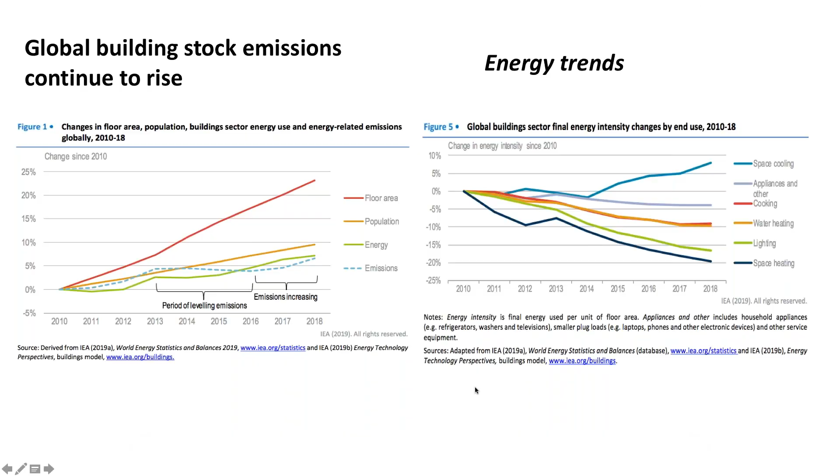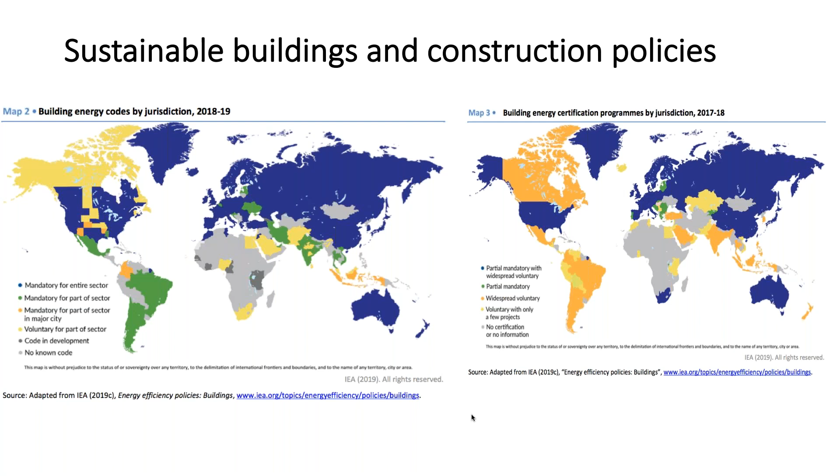So when we read this global roadmap recommendations, we understand that we have to be very careful with urban planning, with new buildings. New buildings have a high potential to be more efficient. We have to work with the existing building stock because there are ways of turning it into a more efficient stock. Building operations are very important, and you can save a lot of energy with nice building operations. We have to think of systems being more efficient as a whole, buildings connected to the electric systems and interacting with them. We have materials that can be more efficient, less energy intensive.

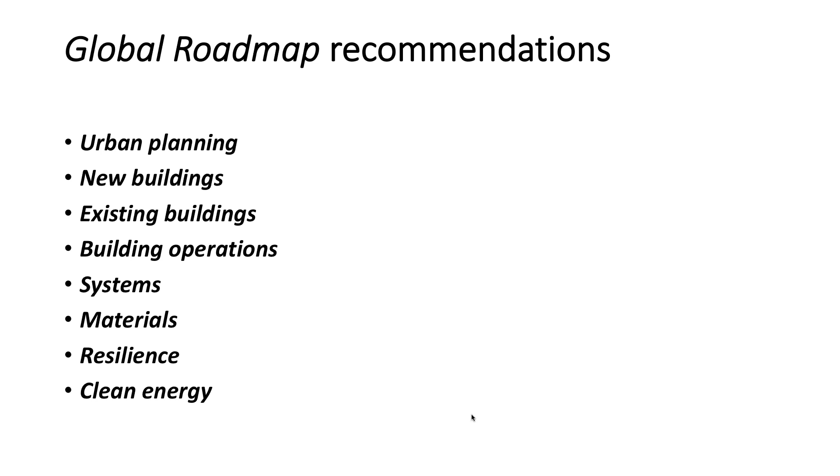We have to think on resilience. Probably in the future, we might see some energy not being available for some times, and we have to make buildings that can resist to that. And of course, we have to think on clean energy for growth.

Energy efficiency was something that was not on the International Energy Agency agenda, but in 2013, we've seen it becoming part of the agenda, and they defined energy efficiency as the first fuel to be used, because it will never finish. You can always be more efficient.

When we think about weather and climate change, this study from IEA shows us that if we want to tackle climate change, avoid it, or minimize it, we have to think heavily on energy efficiency. Renewables are important, even nuclear will be important, but energy efficiency is really the thing to be invested on.

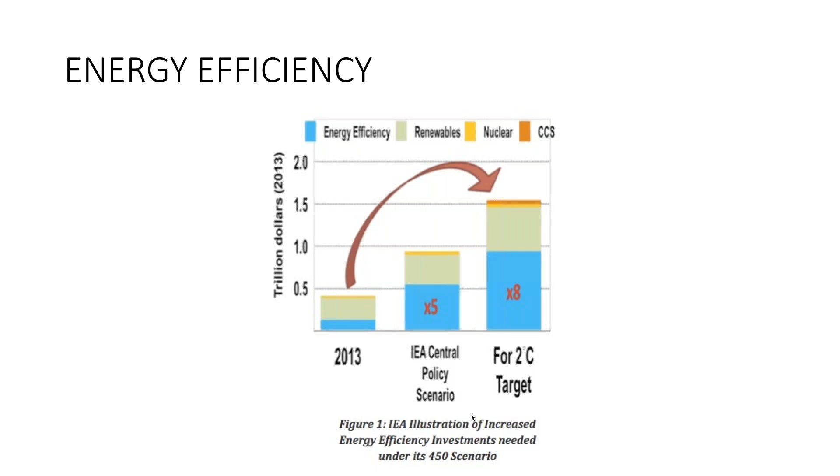If you work in the area of cooling, and most of the people involved in this conference, people from ASHRAE, should read this book from IEA, The Future of Cooling. There are large opportunities for energy efficient cooling, and we are just skimming the surface. We have to really dive into this to provide more efficient cooling as a whole, not only machines, but systems, design, and everything. So read this book, it will inspire you.

Speaking about the Brazilian energy system, I brought you some data here. What you can see is that as a whole, Brazil is consuming almost 500 terawatt hours. We consume a lot in the industrial sector, but residential comes just behind, and the commercial sector also. So these are very important consumers of energy, and you have more data here.

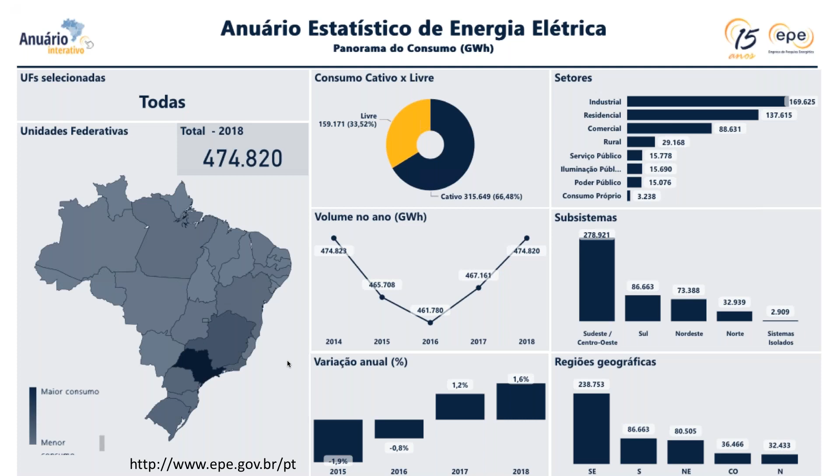When we look into the consumers, we have 83 million consumers in Brazil. 72 million are in the residential sector, and commercial is much less. But of course, the amount of energy used by the commercial sector is quite substantial also. Residential is really intense in Brazil.

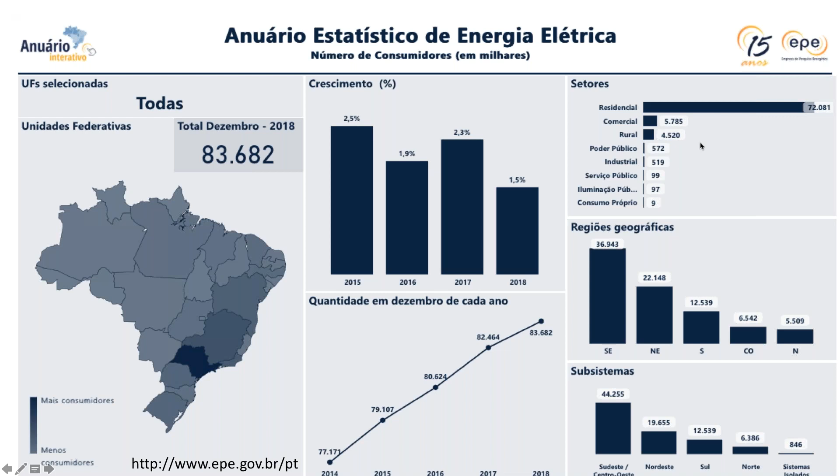When we want to see how much energy is used in buildings, electric energy, we can say that 50% of the electric energy demanded in Brazil is for buildings. Half of this is for residential buildings, and the other half is for public and commercial, or non-residential buildings.

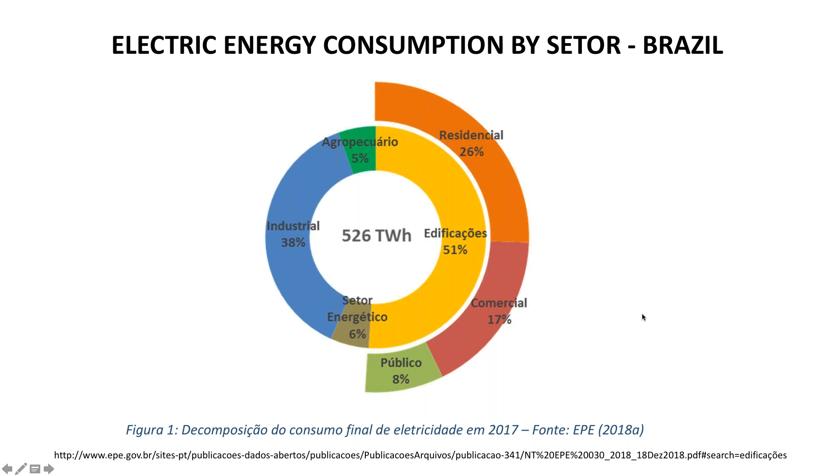And if we look into the electric energy, we are even more renewable. When we think on CO2 emissions per capita, Brazil is very small, only 2 tons of CO2 per inhabitant. When we look into the USA, it's 15, and also China and the European Union. So we have a clean energy matrix, and we have to keep it clean in the future.

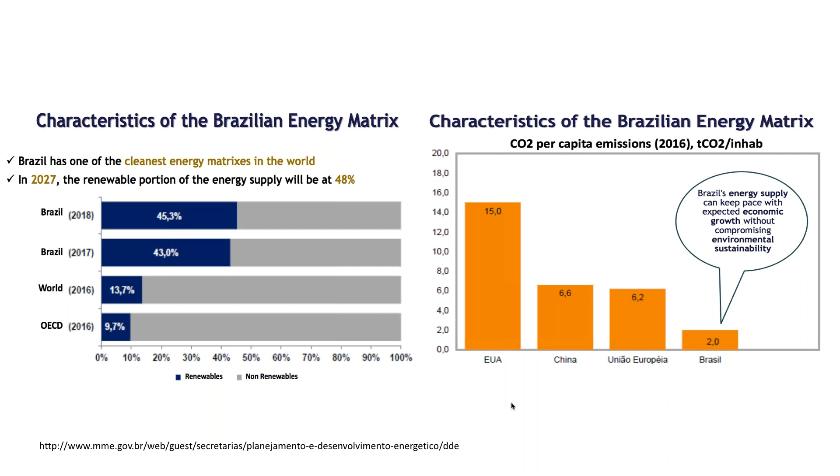This is a bit outdated, it was only updated in 2014, but it shows you the emission factor of our integrated energy system. You can see that it is very low most of the time, and then it becomes higher when we have dry seasons, because we are heavily based on hydro.

But here I can say that the electric system was handled in a very inefficient way. This was towards the re-election of Dilma, when we had an energy crisis due to some drought in the country, and the crisis was hidden from the population, and nobody was saving energy. So this was a pity.

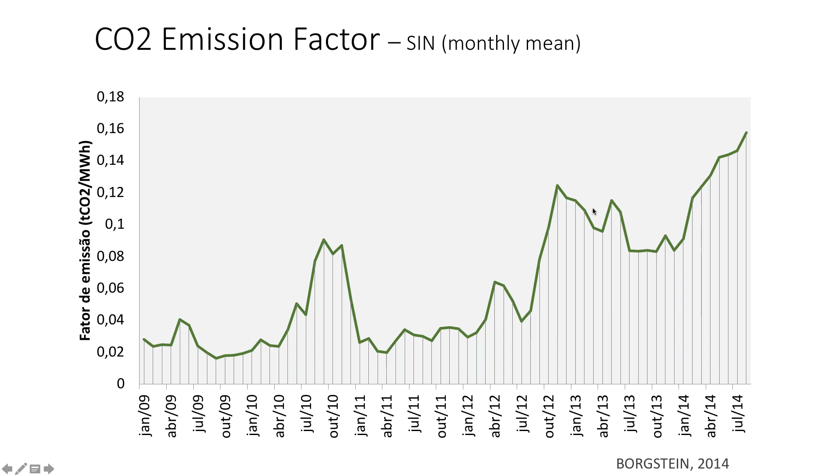The other thing that is changing is the peak time. If you see in blue here, you'll see the time of the peak during the cold months. It's normally in the evening, after 6 o'clock, generally associated with the electric shower. But if you look more to the right, you will see that in the hot months, the peak is moving to the afternoon, between 2 and 4 o'clock, and this is mainly air conditioning systems.

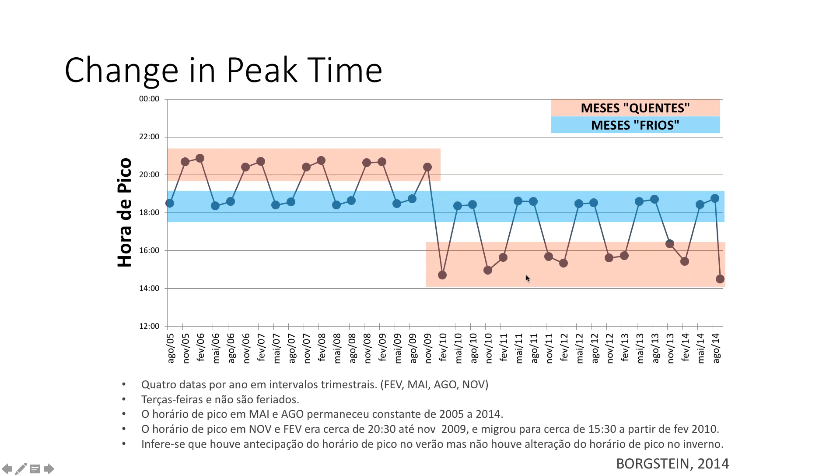So we have to be careful. Air conditioning ownership is growing, and mainly we're speaking here of the commercial sector that is working during the afternoon, and it's causing stress on our electric system. So we have to think about that to be more efficient.

Just a big overview of how strong our electric system is. We have a very nice interconnected system, as you can see on the right here. We cover most of Brazil. It's nice to see that our central generation system is heavily based on hydro.

Wind energy is the second, but it's going to be doubled by 2027. We have natural gas, and we have solar that is increasing substantially, and it's bound to grow even higher in the next years. This is all governmental information, and I give you the reference here.

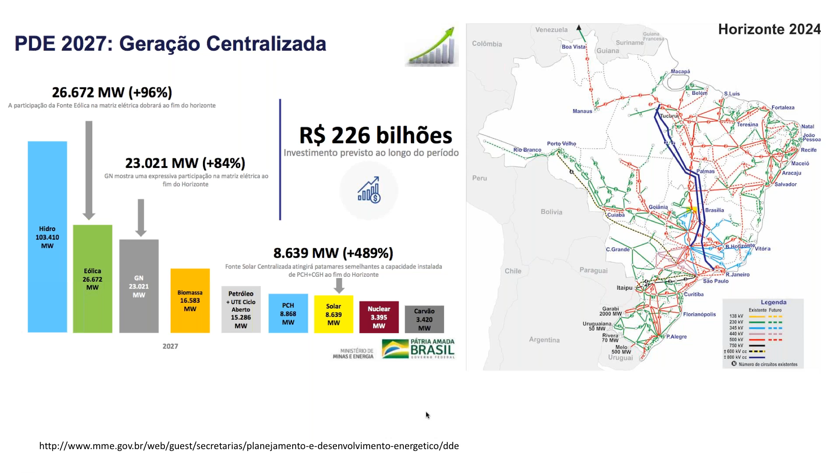Distributed generation is also being invested in heavily in Brazil, and here we can see the importance of zero energy buildings in the future and this kind of thing. You see that the forecast is to have 1.3 million micro and mini generation units by 2027. So this is a sector that is growing substantially, and this is what we call green jobs.

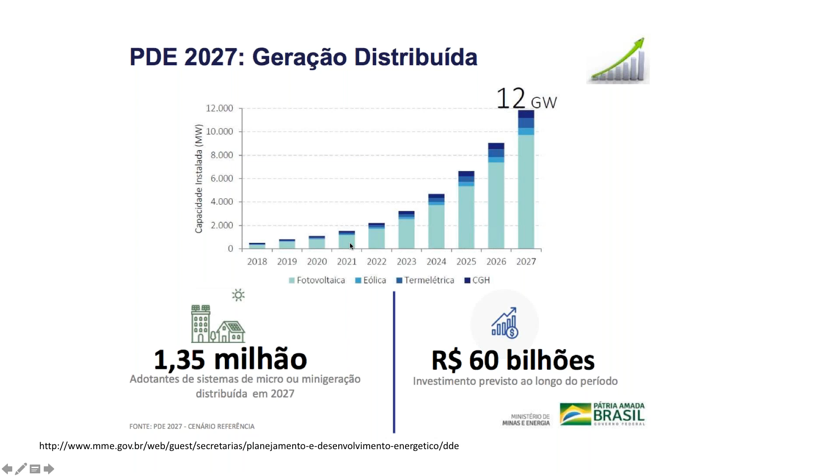The strategic vision of energy efficiency in Brazil, from the governmental view, is that it reduces costs and increases competitiveness. It can raise economic efficiency. It's good for business, it can delay investments in infrastructure, and it reduces social and environmental impact. So it's good for everybody.

A brief history of energy efficiency in Brazil: the Brazilian labeling scheme started in '84. In '85 they started Procel, the Brazilian Energy Efficiency Program. In '91 they started Conpet, the equivalent to Procel for gas. In 2000 we had the creation of ANEEL, the regulation body for the electric system. In 2001, due to the electricity crisis at the end of the Fernando Henrique Cardoso government, caused by lack of investments in the system and a dry year, law 10295 was approved.

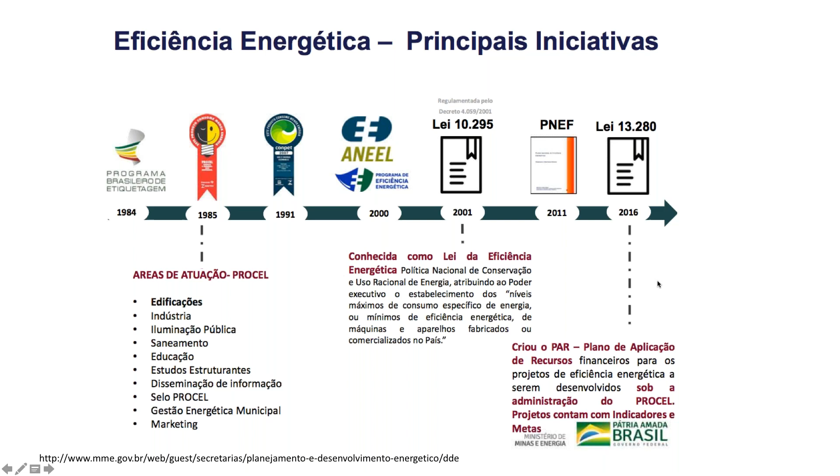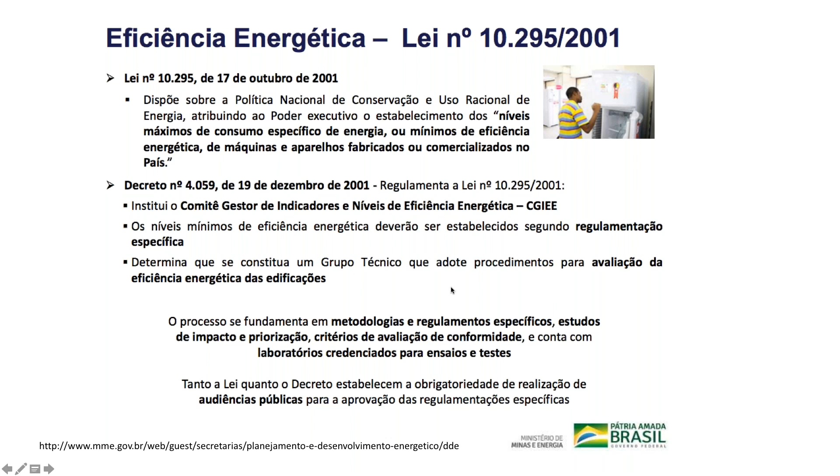This law creates the CGIEE, the committee that takes care of energy efficiency indicators, where minimum efficiency standards for appliances are approved. I am a member of this committee representing the universities. Inside this committee we also have a technical group working on energy efficiency in buildings, where I'm also a member.

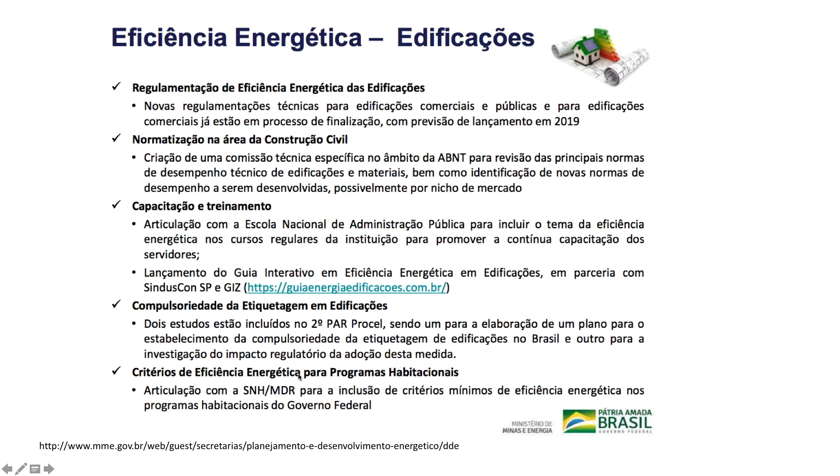So what's the governmental view of energy efficiency in buildings? They think we need regulations, we need standards, we need training, we need to work towards compulsory labeling, and we need to put more energy efficiency criteria into residential programs from the government.

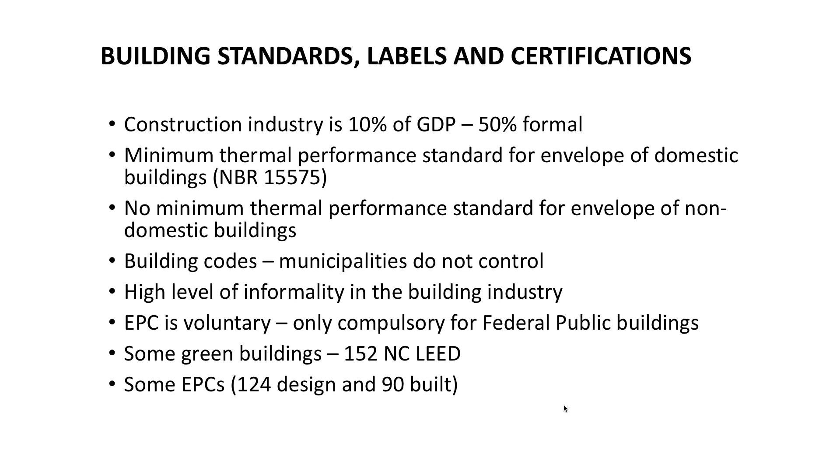So let's speak a bit about the Brazilian program of labeling. It involves fridges, air conditioning, PVs, solar heaters, lighting, TVs, and buildings became part of this agenda.

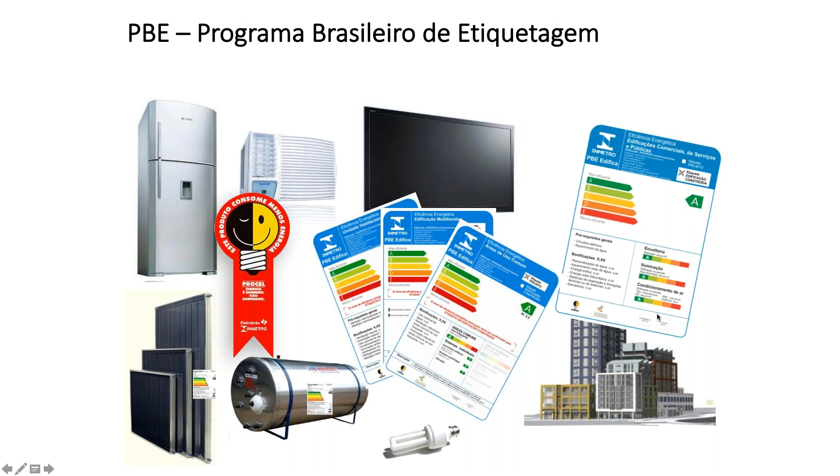If you want to learn more about the Brazilian labeling scheme, you can watch this site, pbedifica.com.br, where you can find all information on the labeling system for residential and non-residential buildings.

We started the system in 2009 with non-domestic buildings, and in 2010 with domestic buildings. And in 2014, it became compulsory for federal buildings.

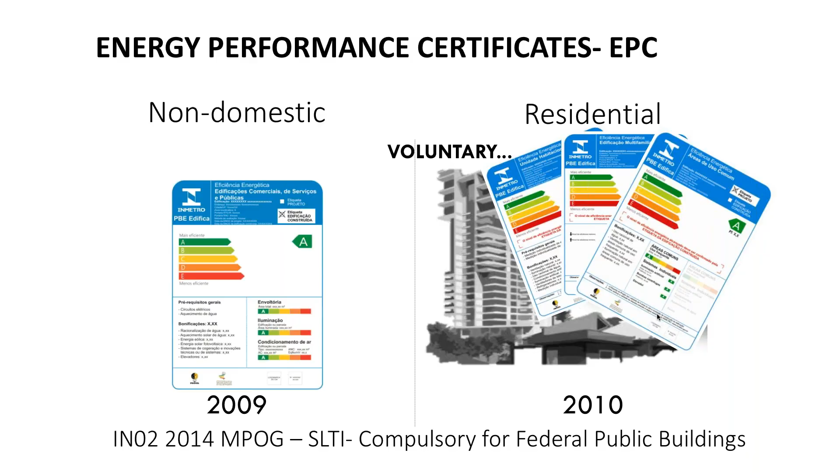In 2014, also together with this compulsory need for federal buildings, we created an ordinance that required everything bought by the government to be efficient. So the idea is, if the government buys a split system or car or anything that has a label, it should buy the more efficient one in the market.

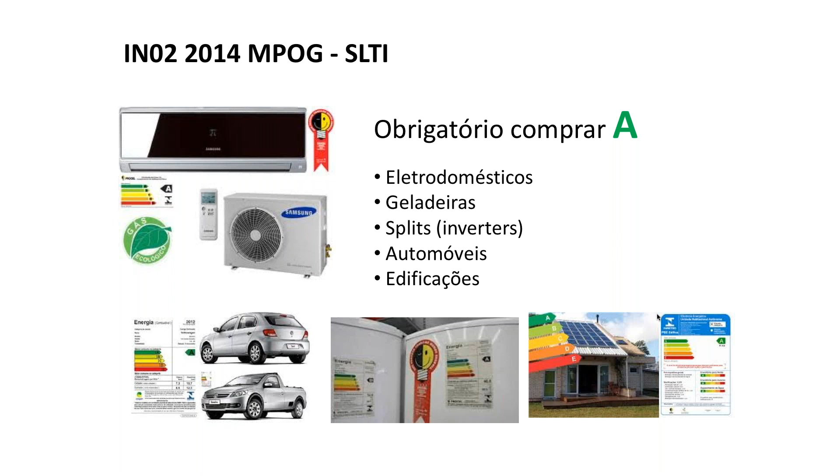So how does the label work? We have a label given in two instances. One instance is the labeling of the design, so this is the intention to build. When you do the design, you have only an intention, and this label is normally confirmed or not confirmed when the building is delivered.

So the idea here is to protect the consumer. When he buys the intention or the design, he has somebody to check if the efficiency was delivered to him after the building was delivered.

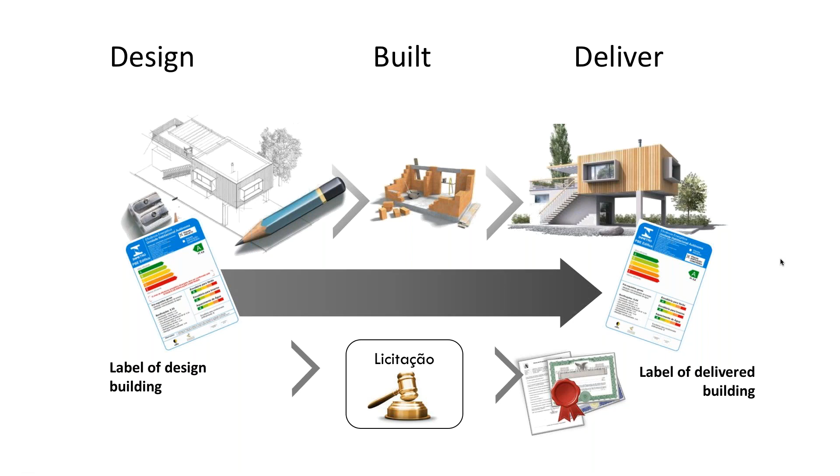You can evaluate the building in two ways. One is a simplified way, like tables or simplified models. We used to call it prescriptive, but it's not so prescriptive because it has some modeling behind, like normally very basic models like regressions and things like that.

But you can do the simulation, and the simulation is really the proper way of evaluating a building. With small buildings, normally it doesn't make sense to be involved in simulation, that can be a more expensive exercise. But with large buildings, I would say that we should be using more building simulation, because we can optimize them substantially.

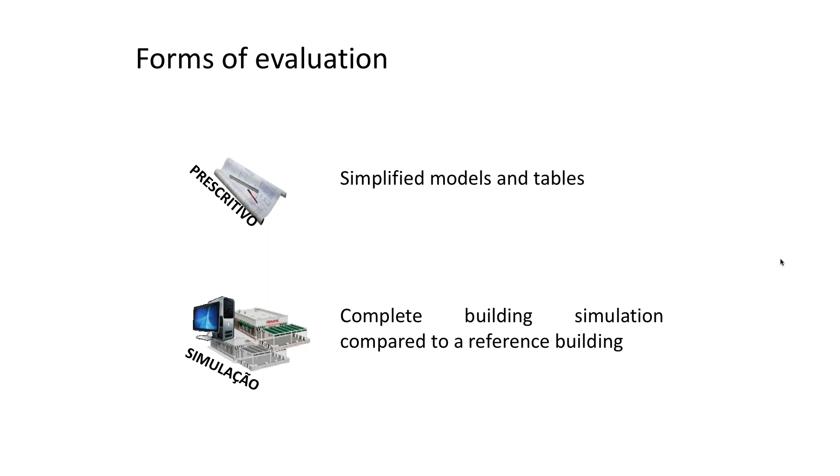When we go for the residential buildings, we have three labels. One label is given to the individual unit, the other for the multifamily condominium, and the other for the common areas of the condominium.

The method tries to incentivize the building to work with natural ventilation. So what we evaluate here is really natural ventilation. During winter, we evaluate heating, and hot water is a very important end use on houses in Brazil.

This is the label that we have today. It has some bonuses given for things like natural lighting, daylighting, rational use of water, energy efficient cooling systems, fans to help achieve thermal comfort, and other things. And here at the top, we have the information on whether it is a label for design or for a building that is already constructed.

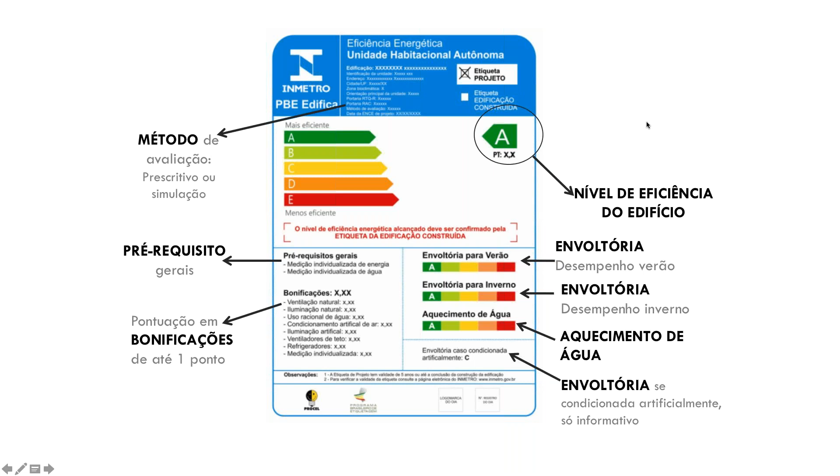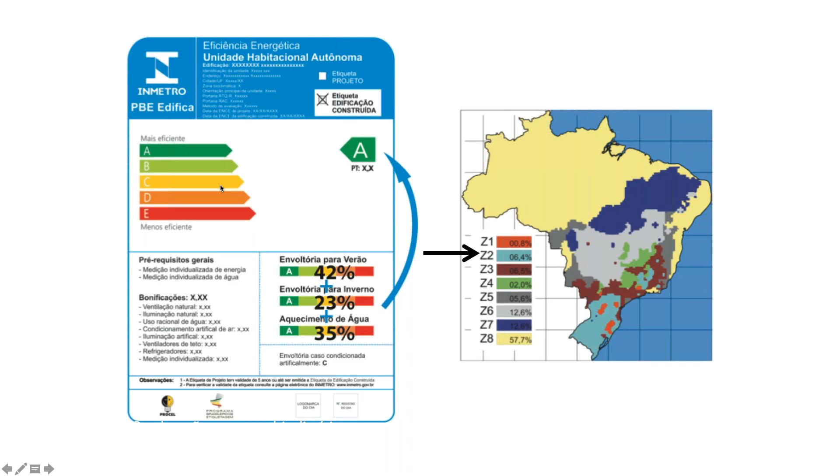Just to give you an idea, when we take different climatic zones in Brazil, you have a different proportion of these end uses that are accounted for to give the main label of the building.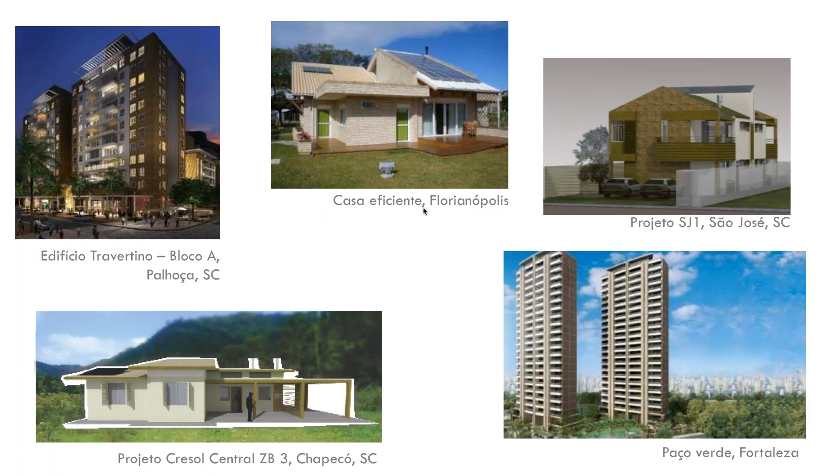So what about the new residential label? We've been working on this in our last contract with Procel, but I should say that at the moment this is on hold because we need to integrate it with the changes that are going to be implemented in the Brazilian standard 15575. So we want to realign this with that.

But you can see that now we are speaking about a new kind of label, more in line with the international tendency. So the evaluation here is on primary energy, so in this way you can add electric energy with gas.

That is quite common in residential buildings. Also, we want to show how the building works when it is naturally ventilated. We want to show emissions of the building, energy use, and how much electricity is generated on site. So it's a label that is prepared to show net zero energy buildings.

And we also put some information on the rational use of water. So the idea is to have this scanning thing, a QR code, that you can use to get more information and details on how this building was evaluated.

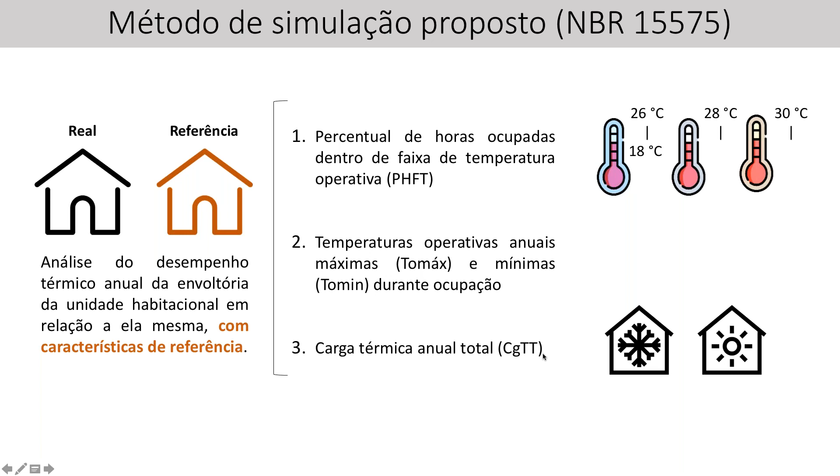So this is to give you an idea of how good your house is in terms of natural ventilation and bioclimatic design. We also check the maximum and minimum temperatures, and this evaluation is done during a whole year. Then we calculate the thermal load on the house during the whole year, heating and cooling load hourly, and this can help you calculate the energy consumption of the house. So this here will be the link with the energy labeling of Procel.

But it's going to be improved substantially very soon, I will show you. So what we were evaluating here was the envelope of the building, the lighting systems, and the efficiency of the air conditioning. And the average of this will give us the efficiency of the building.

With these old labels, it was impossible to calculate the energy consumption of the house. It was only giving the idea of how efficient it was.

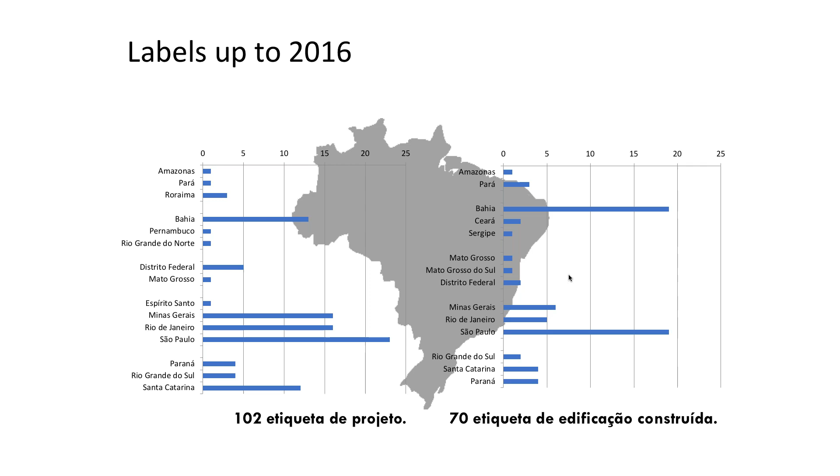This is more distributed in Brazil, the labels that we had. This is the 100 labels that I mentioned before, some buildings that received this labeling.

Procel decided to do the seal. The seal is given to the most efficient appliances in the market, and for buildings, they decided to give this for buildings that were AAA. All the subsystem evaluations had to be at A level.

Also, we showed that the Procel seal was equivalent to LEED in terms of prerequisites of energy. So we reached an agreement with the USGBC, and this was accepted in the certification also.

This was 2015, so this is the new asset rating for non-domestic buildings. This passed a public consultancy 2 years ago, and now we are finishing the evaluation of the more than 600 comments that we received at that time.

We are just starting a new agreement with Procel to work on that, and this should be published in the second semester.

So the new evaluation for the new EPC rating for non-domestic buildings is much nicer than the previous one. It's also based on primary energy.

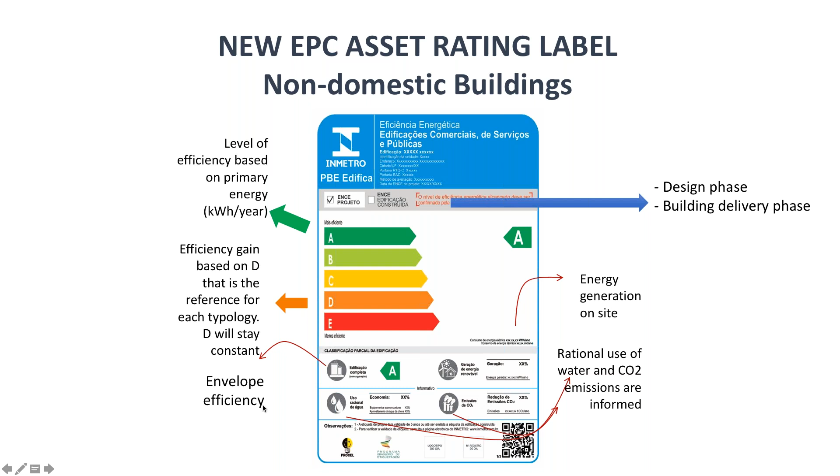So how does it work? I think this is more interesting for people with ASHRAE background. In terms of non-domestic buildings, we separated by end uses. So we have the HVAC for cooling, HVAC for heating, and we have hot water. Some buildings will not have hot water, but some of the non-residential buildings have hot water, like hospitals and hotels.

So we estimate the annual cooling load. This can be done via a simplified method that is based on neural networks, estimation based on thousands of simulations. Or you can use, probably in the future we are going to adopt ISO standards to do these calculations.

And then you subtract the cooling from cogeneration, because this will be free cooling in a sense. And you divide by the COP of your system or SPLV, system part load value, depending on what information you have on your system.

And then you will have the energy consumption in terms of electric, if this is electric, or in cubic meters of gas, if this is a gas system for cooling. Heating system we considered not significant in Brazil, so we are not evaluating this.

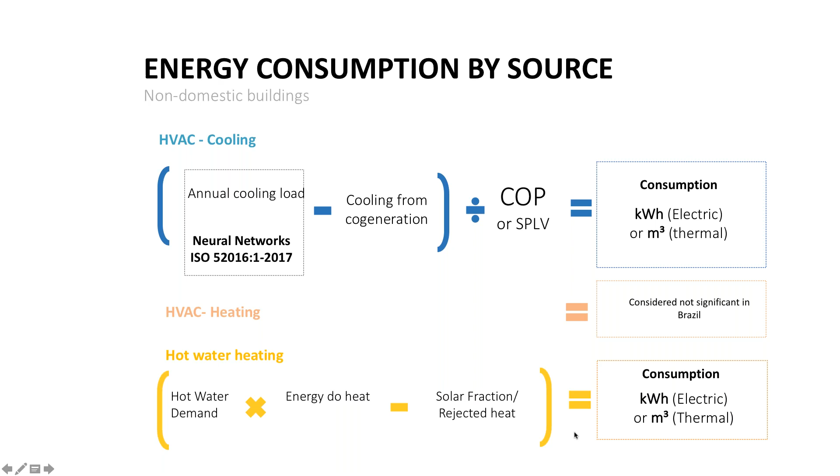Or you can do this by simulation also, of course, just taking the easy part here of the simplified model. So your electricity consumption is subtracted by local renewable energy generated on site, and you multiply it by the primary energy conversion factor. The thermal energy also is multiplied by the primary energy conversion factor and added, and then you have the primary energy consumption in kilowatt hour per year or per month of your building, the real building and the reference building.

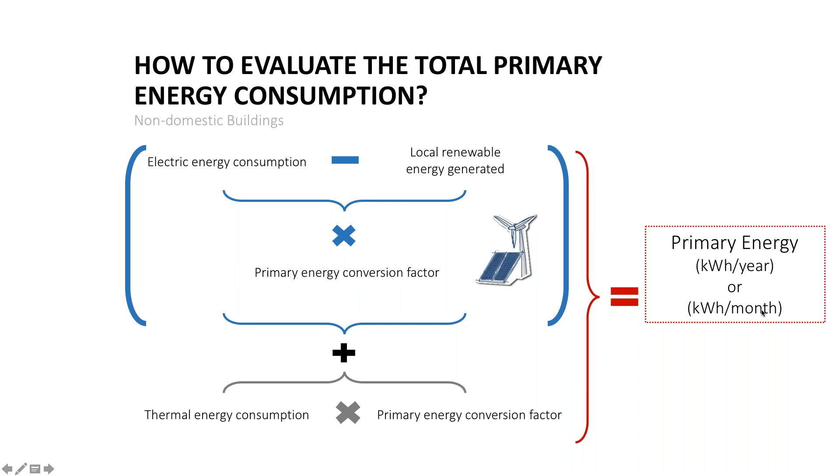And depending how much you saved from the reference building, you'll receive your energy efficiency class. So this evaluation is done in terms of primary energy.

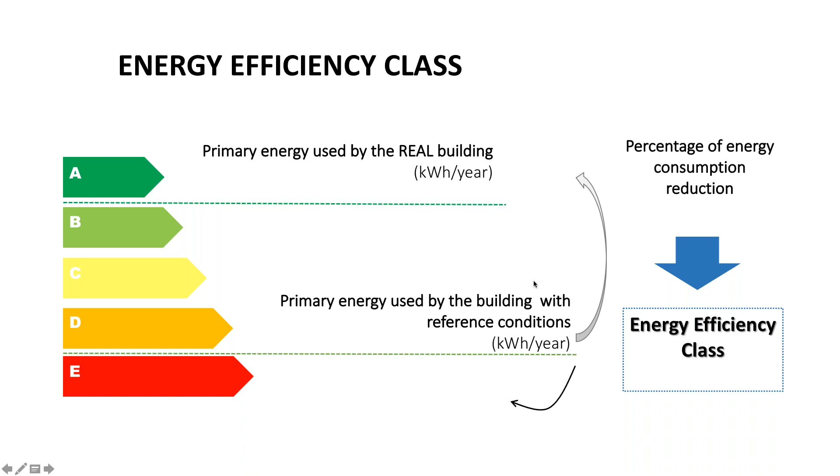Speaking a bit about COP, SPLV, CSPF, different ways of evaluating the efficiency of the cooling system. We started last year a transition from COP to CSPF based on ISO 16358. So to give you a summary, basically our split systems were only evaluated according to their COP. And now we are moving the evaluation standard to partial load also. So the seasonal COP is going to be evaluated in this way.

So we are really trying to value more inverter systems that are much more efficient in partial load. So this is for small machines.

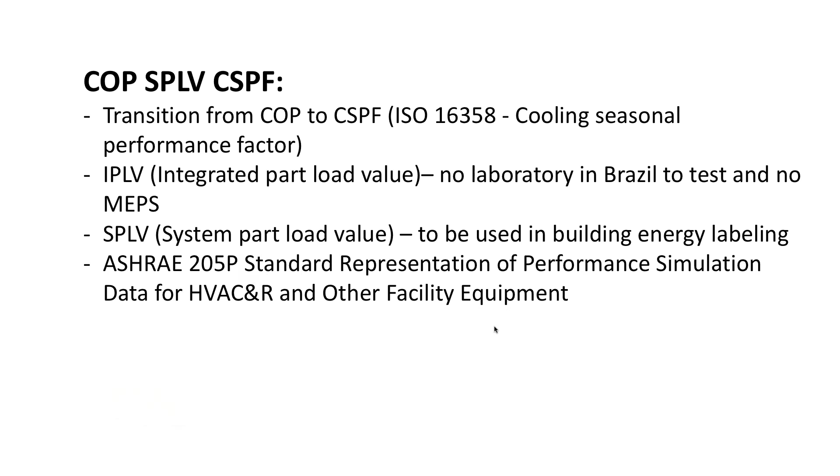Talking about the performance gap, we spoke about energy performance certificates that are given at the beginning of the operation of the building, but after the building is operated, sometimes part of this performance is not well used, or the possible performance is not really developed.

You can say that, oh, so we are selling illusions. Well, no. Sometimes the buildings are not very well operated. So you build a Ferrari and you put a truck driver to drive it. He's not used to the performance of the Ferrari and does not know all the tricks that it has. So we have to improve this, and in this area we are working with Brazilian Council for Sustainable Building, together with Procel also, and we are developing the energy performance certificate for buildings in operation.

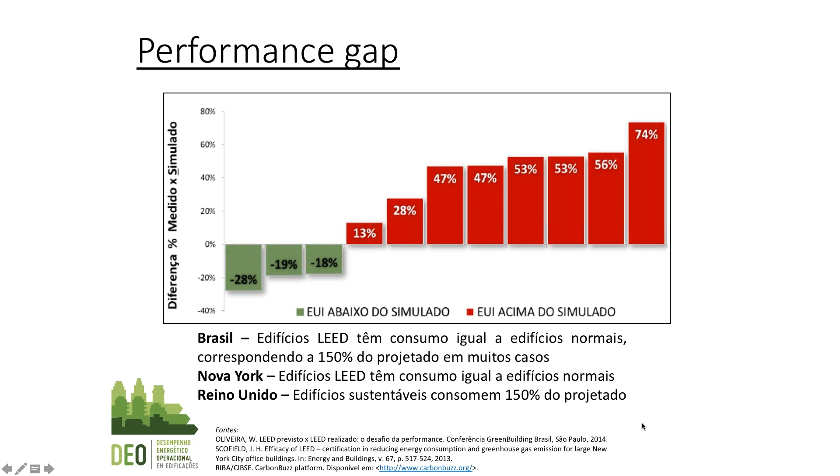So this is done, it was started by CBCS, and at the moment we have a project together with Procel where 15 typologies of non-residential buildings are being evaluated, and we are developing this benchmark system for them. So this should be ready by next year.

Talking a bit about the road ahead, if we look into the international scene, we are going to see ISO standards on the 52000 series, and these are standards that have been reserved for energy performance of buildings. If you want to learn more about this, go to epb.center, you will see very interesting things happening there. The recast of the Energy Performance of Building Directive in Europe is based on these ISO standards, which are being developed, some of them developed very recently in 2017, and some still under development. So what we plan here in Brazil is really to join this movement on the ISO 52000, and this should be the future for energy performance of building evaluation in Brazil in a few years.